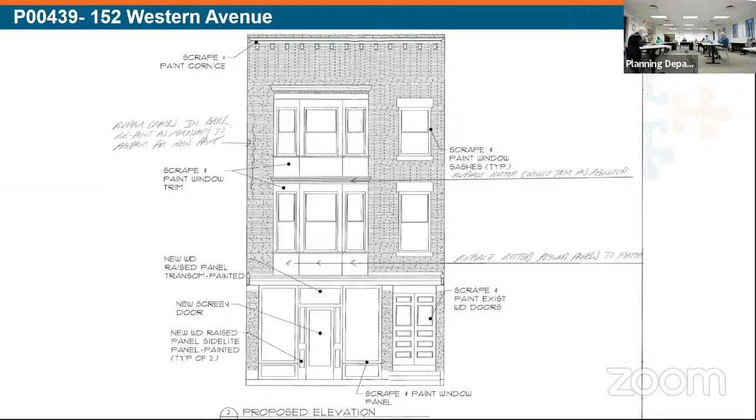The next item to come before the commission is 25 Delaware Avenue, in the Center Square Hudson Park Historic District. This is the construction of a 4-story multi-unit residential building and rehabilitation of an existing, or former, fire watch station.

We have Matt Duggan on Zoom, and then Michael, if you would like to introduce yourself. Michael Berkby, project director with Conifer Realty, the developer. Bill Lafricci with Hershberg and Hershberg Design Engineering. And Matt Duggan with TAT, the architect for the project.

Matt, just let me know when you want me to proceed through the slides. I was just going to start with a brief recap of the project and the steps we've taken to this point.

Conifer Realty became involved with the project a couple years ago. The property is currently owned by the Albany Community Development Agency, and we have it under contract for purchase. We have planned to rehabilitate the existing building and develop a 4-story multifamily apartment building behind it, situated on top of a semi-submerged parking garage. Last summer, we came before the HRC a number of times and had a good conversation and a collaborative effort to improve the design of the property, and I thought that was very productive and ultimately resulted in a better design than where we started.

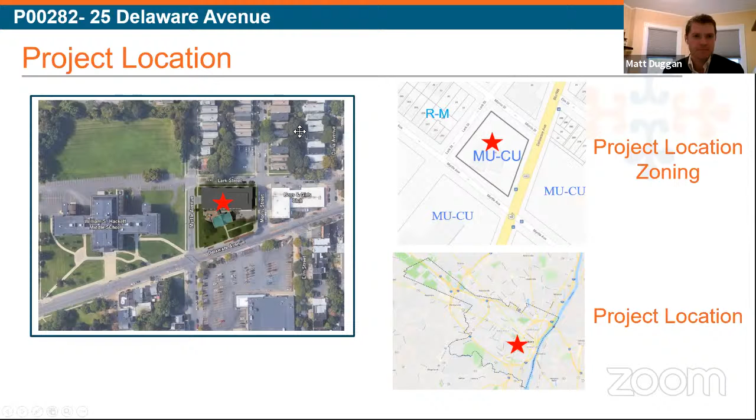You go about 2 feet up to get to the Delaware Avenue facing facade of the fire signal building, and then the grade drops off significantly. So the grade behind the fire signal building is a half story below where it is on the front, about 3 to 4 feet lower than Delaware Avenue. And as you get to the corner of Myrtle and Lark Street, you're down an additional 12 feet from there. So there is a significant slope as you head towards that corner.

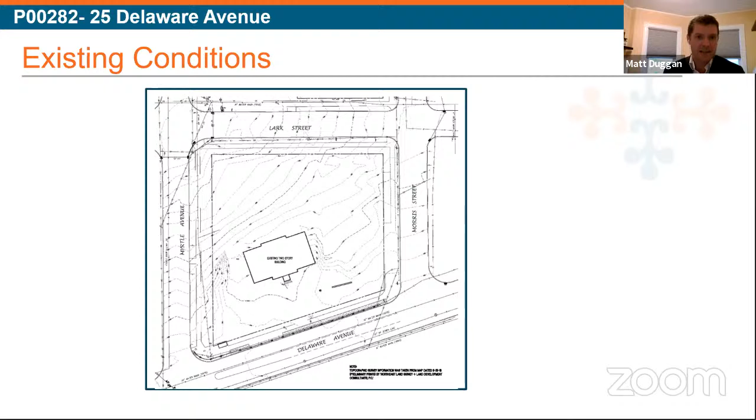So here's our, since we met, some change to the grading. One of the strong comments we had heard from the commission was a desire to restore the openings at the basement level of the building. So we had stated concerns about those openings and concerns of snowdrifts against them.

To address and mitigate those concerns, what we have done in this proposal is lower the grade on the south side of the building, that's left facing Myrtle Ave as you're looking at this plan. Essentially, today, those masonry openings are below grade, or at least their sills are below grade.

Additionally, to mitigate the concerns, we are proposing to add a crushed stone maintenance strip on the south and east elevations of the building to allow property management to remove snow drifts from accumulating against these windows and getting into the building. This is certainly a concern our client has and we have as architects, but we have heard your comments and are prepared to make these changes to include those windows, despite the concerns to building maintenance and health. We believe we do have methods to achieve the building staying in a healthy condition.

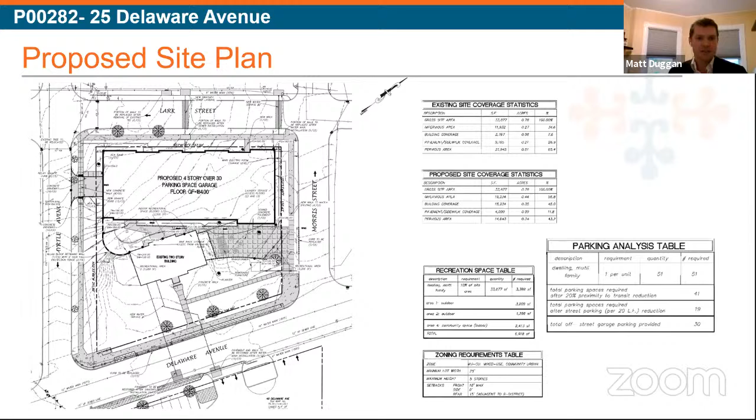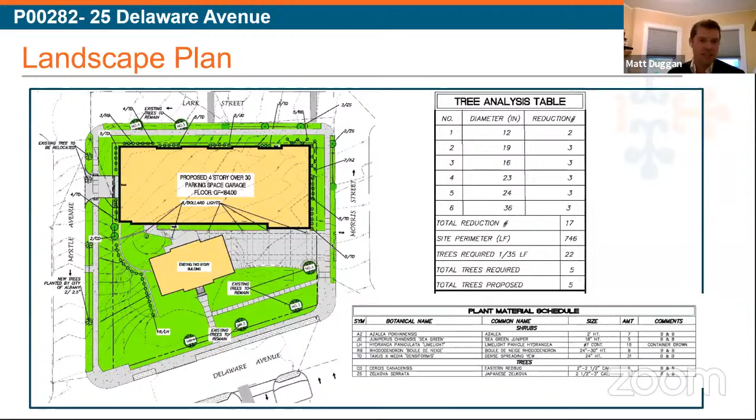So here is an image from the prior design. You can see that the retaining walls were a bit different, but it's also important here to look at the trees that are being retained and also the trees that are being removed. One of the comments from the site visit conducted last year by the commission was that there were some trees very close to the building causing potential damage. There are 3 of them, and those 3 trees are proposed to be removed. In the following slides, you'll see images of them in the photographs.

Our spec includes 2 different chemical cleaning procedures to remove it, and our spec also requires that all cleaning is done with a series of mock-ups. The preliminary mock-up cannot exceed 5 square feet. We will start with a 50 pound per square inch rinse nozzle and only proceed to a higher pressure as required, keeping it a slow process. Again, the preliminary sample can only be a maximum size of 5 square feet, and we have 2 different chemical paint removers specified to remove this paint.

On the brick itself, we will also be doing a cleaning procedure, very similar, however it will not use a chemical remover. Again, we will do a 5 square foot maximum mock-up; if the results are positive, we will proceed with a 50 square foot maximum size, and if acceptable, we will proceed to clean the rest of the building. Our spec requires that cleaned areas blend in with all adjacent materials so there isn't a stark contrast from one level of cleanliness to the next. That being said, we are proposing to clean the entirety of the building pending acceptable mock-ups, so that should be less of an issue.

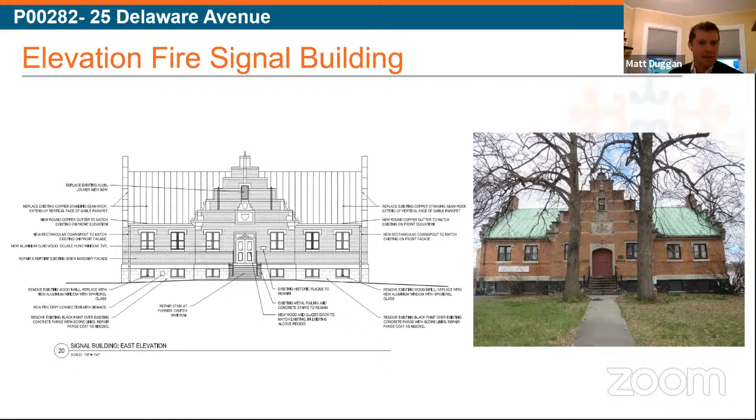That is basically taking its cues from what exists on the east elevation of the building, so the elevation facing Delaware Avenue. In the center, we will also be rebuilding and removing the former flashing that you can kind of see in the center. It's a little white in this photo of where the roof of the prior building was. There's also a concrete roof from the existing building, right in that area, that will also be removed. And that will be restored with new brick to match the existing.

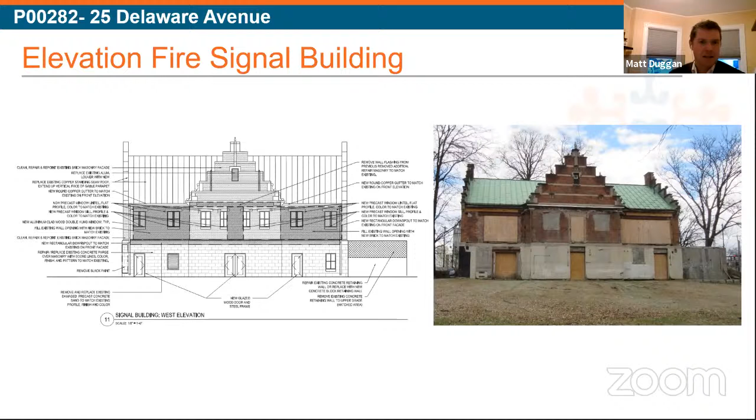And that will allow us to bring back the 4 masonry openings that previously existed on this facade at the lower level. We will be replacing them with new aluminum windows. They will be 2 fixed windows per masonry opening mulled together. On the upper level, we will be doing the same window scope that we described on the east elevation. The masonry scope will remain the same as the east elevation. You can see here some of the damage that has been caused by the roof and the coping at the parapet cap on the gable end. Next slide, please.

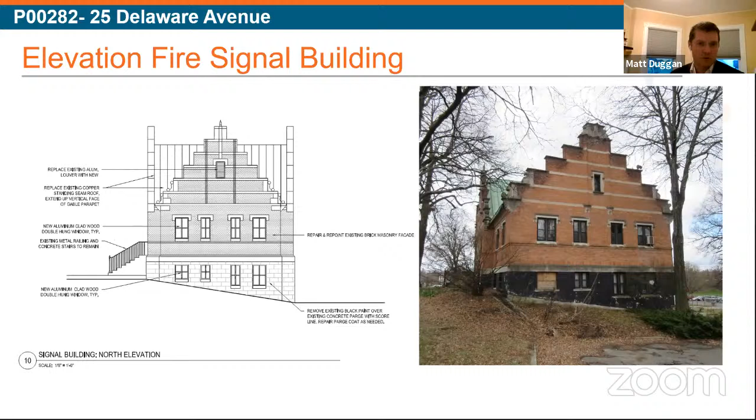And then here, this is the 3rd tree that is proposed to be removed. This tree, again, is right at the corner of the building, and that is proposed to be removed. In the site plan on the first page, you can see that similar but not identical to what's shown today, there will be a landscape buffer adjacent to the building. So those slopes essentially remain consistent from what you see today, with only minor modifications. Next slide, please.

So here's the plan of the building. On the right side is the lower level or the basement level. You can see that facing up on the page, that's the double doors on the west elevation, which is where the main accessible entrance to the building will be located. And to summarize the window scope, it's proposed to essentially have windows in all 37 of the original window openings. Today, there are 17 windows in those openings. So essentially, we will be restoring 20 openings to have windows that today are filled in with either masonry or plywood. Next slide, please.

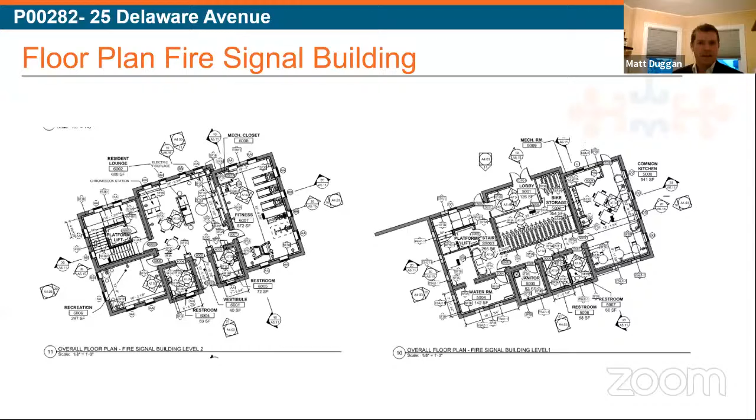So here we have noted the comments from last summer's site visit. Most of these items we've already touched on, but the first one was a request that all spalled brick be replaced with new brick to match the visual and physical characteristics of the existing. That will happen. Samples will be provided and a mock-up will be done prior to commencement with work on the

rest of the building. In terms of the mortar, our spec does require that the mortar match the original mortar's physical and visual characteristics. And as I stated previously, we will be doing a 20 square foot repointing sample prior to proceeding with the repointing throughout the building.

In terms of cleaning of the brick, like I stated, we will be doing that. Our plan is to do the 5 square foot cleaning sample, pending approval of the certificate of appropriateness for cleaning the masonry, and then proceeding with a maximum of 50 square foot sample before then proceeding to clean the rest of the building. Next slide, please.

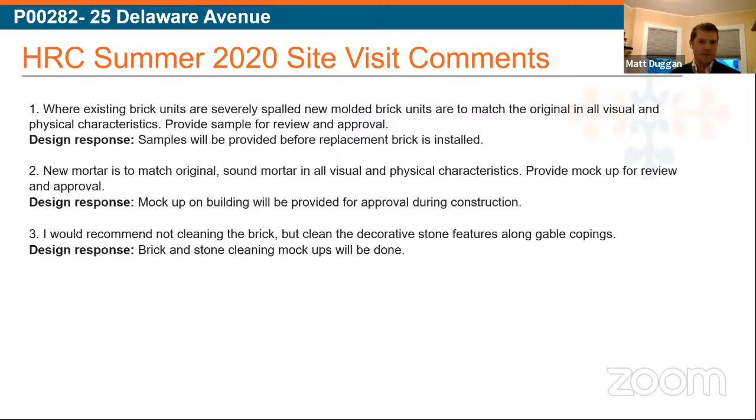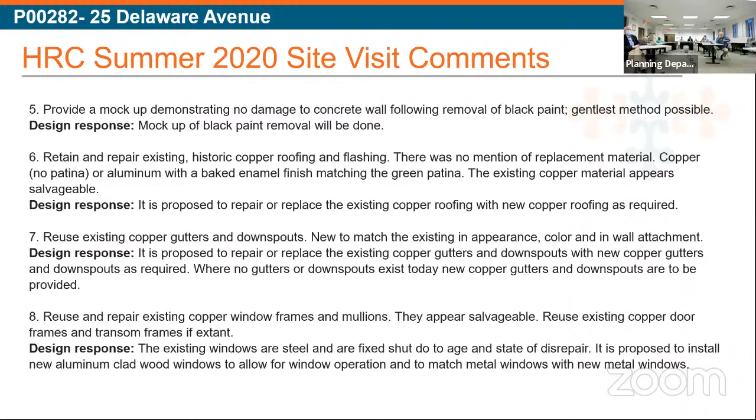Next slide, please. Are we missing some windows that were in the bottom west side? Here? Yeah. No, as Matt pointed out earlier, all the openings on the back were covered by the previous senior center addition. So for most of the windows that are being installed, they're pulling reference from the other elevations. But were there windows there when I first saw the drawing? Previously? On the left and the right of the entrance, yeah. Yes. Were those original windows that were put there in 1917?

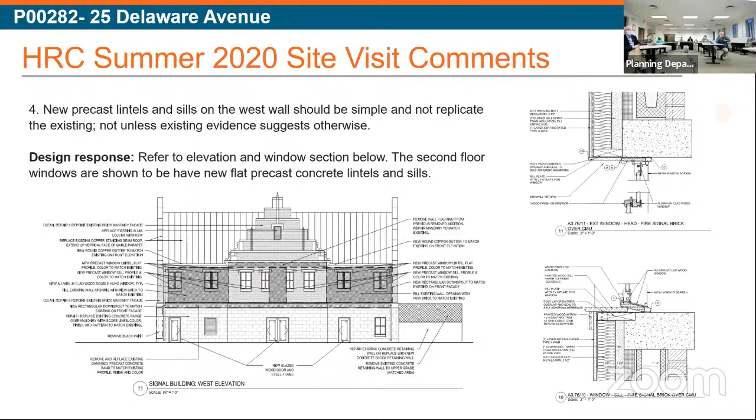Matt, there were no original openings, correct? We unfortunately do not know what the original openings were on this side. We found a photo from Delaware Avenue. We haven't found any photos from the rear. There was an aspirational drawing that was included in the article I was speaking about earlier from a year or two before construction started. And that does show what appears to be doors on the ground level and appears to be windows on the upper level.

But it's clearly an aspirational drawing. For example, in that article, it shows that there are dormers on the roof and several other characteristics that are clearly not present in the building. So it's hard to say what was original there. And I wouldn't say that the drawing that we do have is an as-built by any means. But what we're fairly confident is that there were openings there. What we just don't know is exactly the number or the location of them.

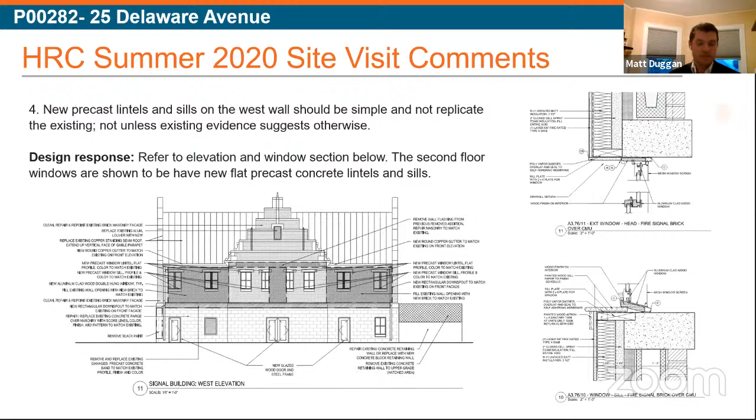So another comment was to provide a mock-up of the black paint removal. So again, we will be doing several mock-ups. We'll be doing that 5 square foot followed by the 50 square foot to ensure that we are not damaging the building when the paint is removed.

In regards to the historic copper roofing and flashing, unfortunately, it's currently in a state where it is causing damage to the building. So our proposal is to remove the copper flashing and roofing. If there are portions of it that can be retained, we certainly will do that. But that would present having patinaed copper in some areas and non-patinaed copper in others. So our preference would be, and we believe we will need to do the full replacement in kind of the copper roof and flashing.

However, the copper downspouts and gutters, where they exist, and if they are in salvageable condition, our proposal is to retain those. If, however, they can't be retained, the proposal is to match them in kind.

In the existing windows, the proposal is to replace the existing windows. We do not believe the existing window sashes are original, and they're currently in a state of disrepair where you cannot open them in a normal manner. And also, there are only 17 surviving what we believe to be non-original windows out of 37. So we do have some concerns that if there are repaired windows and replacement windows, that it may not be the result that we're all hoping for. Next slide.

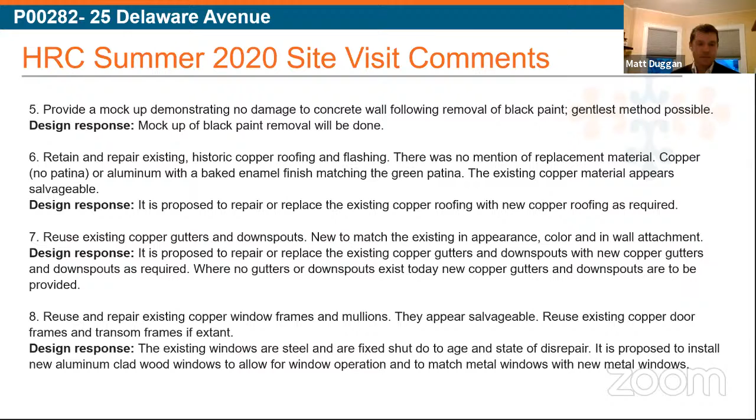Patch and repair the front steps where there are broken and missing corners and also missing railing. That is included in our scope. In terms of vine and vegetation removal from the south wall, our spec does include the removal of all vegetation from the walls. It also does include removal of the roots of vines that are growing up the facade as well. Item 11, this is the note on the 3 trees. It is proposed to remove those existing 3 trees immediately adjacent to the building.

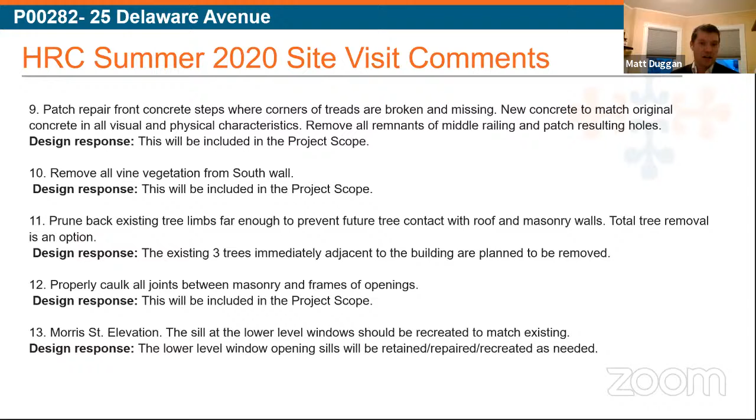All of the joints between masonry openings and the adjacent material, whether it's a louver, window, or door, will be caulked. And the sills at the lower level windows on Morris Street already exist. On Myrtle Avenue, they do not exist, and we will be recreating those at the basement level windows. Next slide, please.

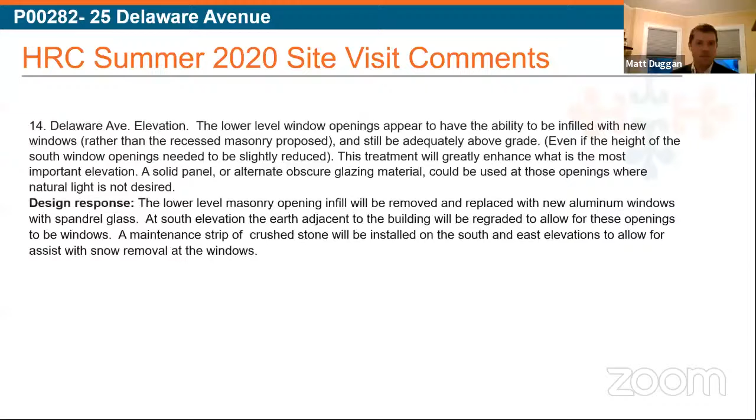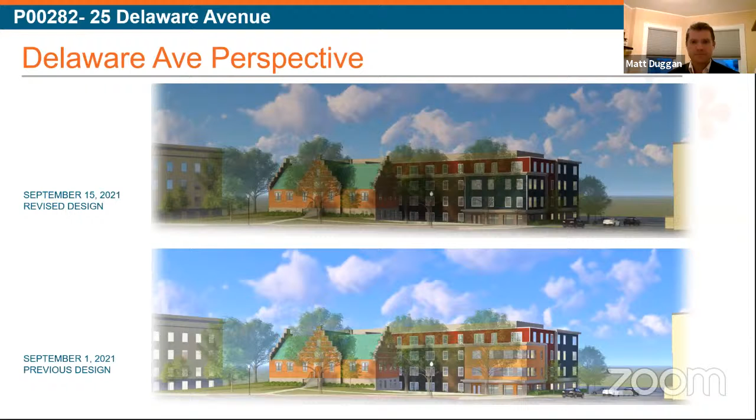So this is the proposal from September 1st. You can see here we were proposing to have a stucco finish on the entry element of the building, and to also have wood panels in between some of the storefront at the ground level, which is facing the leasing and management office space for the property. We were also creating essentially a ribbon window element on the facade as well. All of these elements have changed as we go to the next image here. So next slide, please.

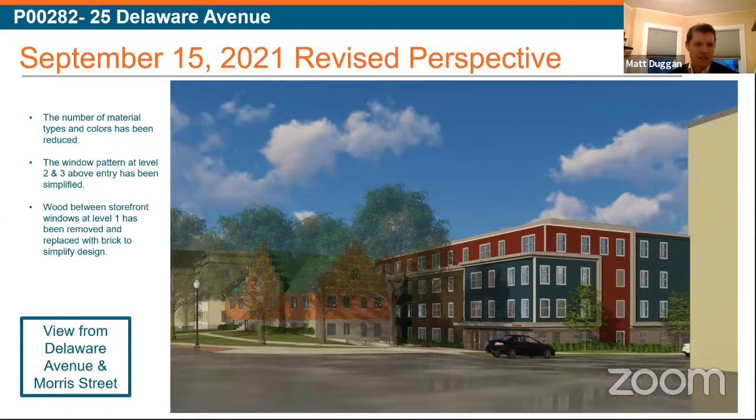So here we heard the concerns about the busyness of the design, the number of materials, and so we tried to simplify it and help unify the building through that simplification. At the entry element, the stucco material has been eliminated. In its place, we're continuing to use the blue clapboard siding, which is used on the Lark, Myrtle, and Morris elevations of the building. We've simplified the window pattern to eliminate the ribbon window look, and we have also simplified the base of the building, which we'll see more in the next slide.

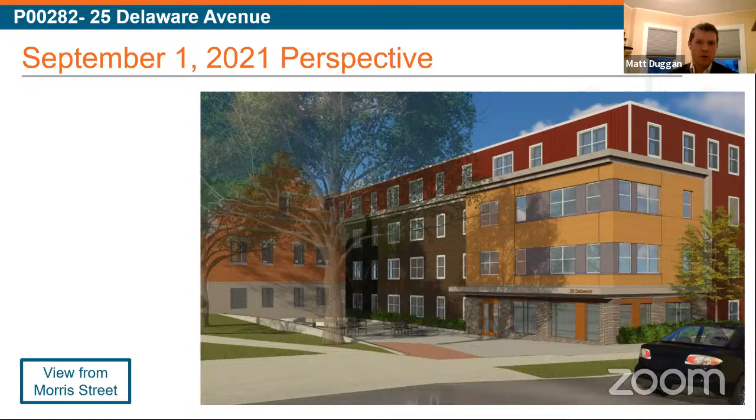So you can see here, this was the prior design. You can see that at the brick base, we did have wood pieces in between the storefront. This was working with that ribbon window that we had at the upper level. So if we go to the next slide, please.

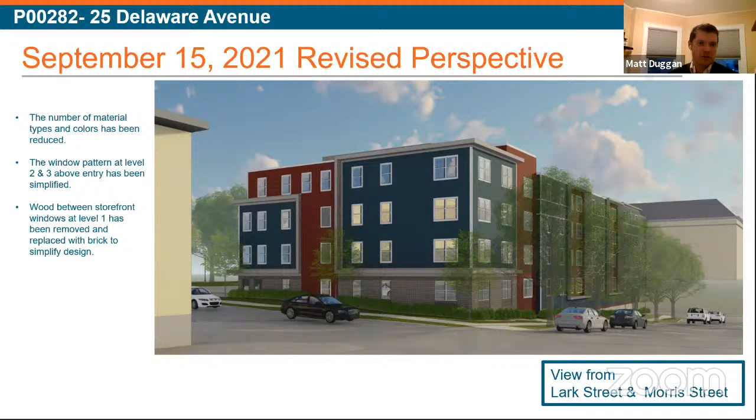So here you can see the simplification of the materials and in the fenestration. You can see further at the base, while we do retain some of the larger glass openings fronting the leasing space, the window furthest to the west or furthest towards Lark Street is the same window size as the windows on levels 2 through 4. And that ties in with the treatment of the base as you work your way to the corner at Morris and Lark Street. Next slide, please.

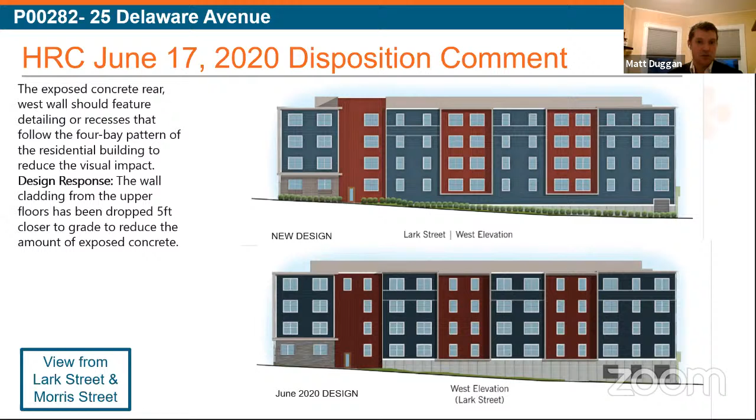And that line goes across, and as we get to the final elevation on Myrtle Avenue, you can see this line also lines up with the top head of the garage doors. So together with landscaping and with this significantly lower siding line, the visual impact of the concrete is greatly reduced in the new proposal. Next slide, please.

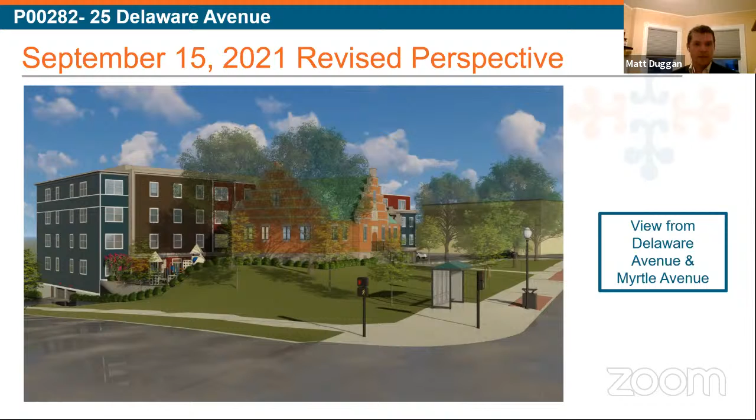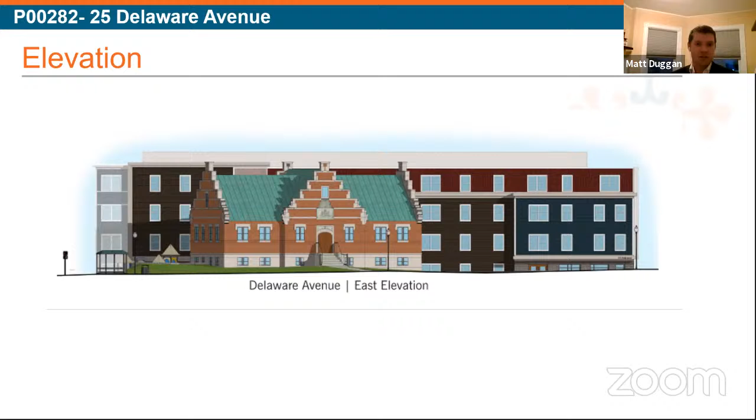So here is a view from Delaware Avenue. As I mentioned at the beginning of the presentation, the grade of the fire signal building is about 2 feet above the elevation at Delaware Avenue. And you can then see that down the hill. Next slide, please.

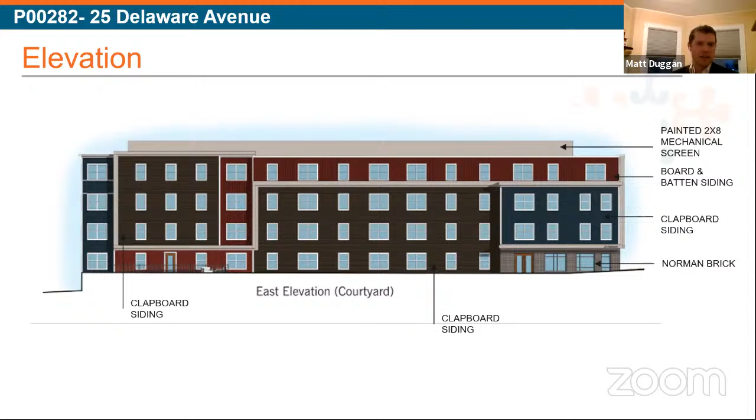So here you can see the materials. We have 3 different color siding materials. We are showing a board and batten at the 4th floor in vertical elements as we were before, but we will speak to that more as we get to the next slides. Next slide, please.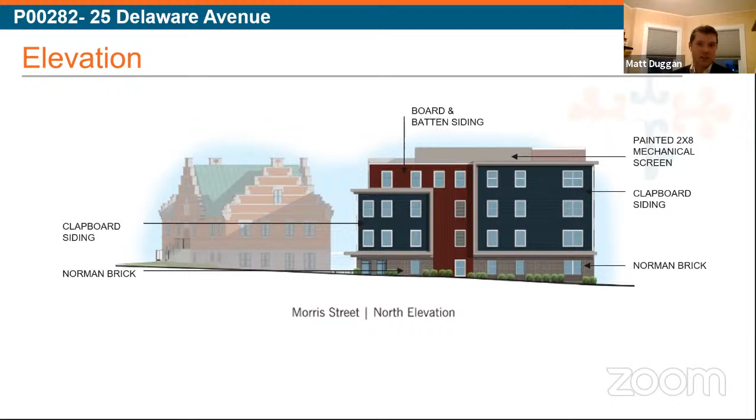This is now the elevation on Morris Street. You can see here that level 3 cornice line being further accentuated by the fact that the 4th floor is set back from that entry element. Next slide, please. Here again is the elevation on Lark Street. Next slide, please. And then here is the elevation on Myrtle Avenue. This is the lowest elevation on the site and where the entrance into the garage is located. Next slide, please.

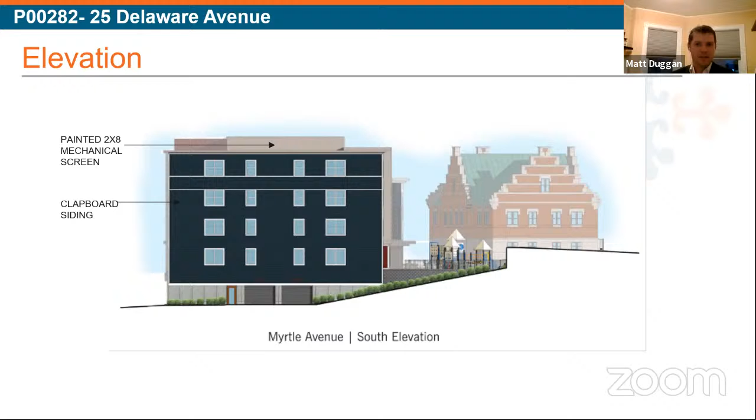So we did hear that there were some concerns about the board and batten. So we have provided some images here that explore eliminating it. So here the red color material is now shown as a horizontal lap siding. This lap siding would have a 6 and 7/8 exposure. Next slide, please. Matt, we lost you there for a minute. We had, the lap siding was gonna have a 6 and 7/8 exposure. Yes. So the next slide will have another image of that as well.

So here you can see that that siding then is turning the corner in between the 2 blue elements that are on Morris Street, and also that horizontal lap siding will be continuing down Lark Street. Next slide, please.

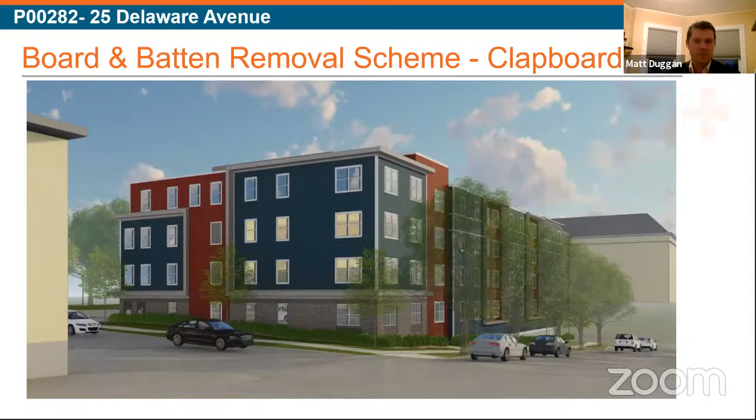And then here are the 2-dimensional elevations depicting that lap siding in lieu of the board and batten. So the thought behind the board and batten was that we do have this element that is happening above the cornice line on this east elevation. And then as you get to the north elevation, it does become a primarily vertical element. So that was the thought behind the board and batten.

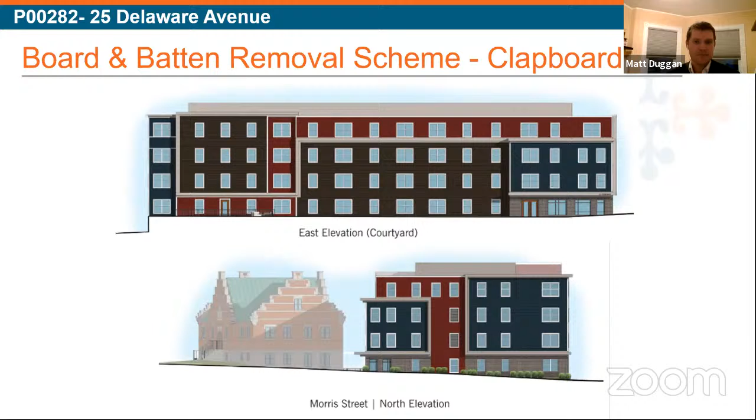But we did want to present the clapboard option, as we do think that it does further simplify the amount of materials on the building, which we know is something that the commission was advocating, and we do know of some concerns about board and batten on this building in general from the commission. Next slide, please.

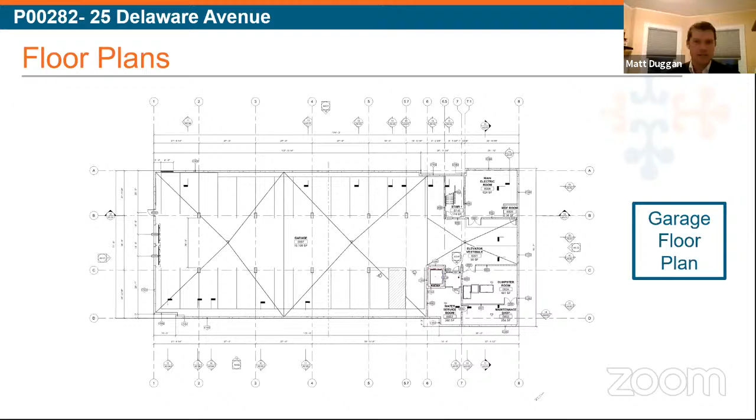So here is the floor plan of the garage level. On the left is Myrtle Avenue where the garage entrance is. The other three sides are either fully buried or nearly fully buried. Next slide, please. This is the first floor. This is the entrance floor. On the lower right, you can see that entry element. It's important to note that this level is at the same elevation as the basement level of the fire signal building. Next slide, please.

The second and third floors are nearly identical. You can see that it does have a small step in the elevation, or in the footprint, at the entry element. And then when we go to the next slide.

At the fourth floor, that entry element is not accentuated. It further accentuates that third floor cornice line.

At the roof plan, we are showing the location of the mechanical units. Those are behind the three-sided mechanical screen you can see here, and on the right is a section through that screen. The screen is 6 feet tall and consists of painted 2x8 boards mounted to posts behind the screen. The paint color of these boards is proposed to be the same as the cornice ribbon element throughout the building, so it's that light gray color.

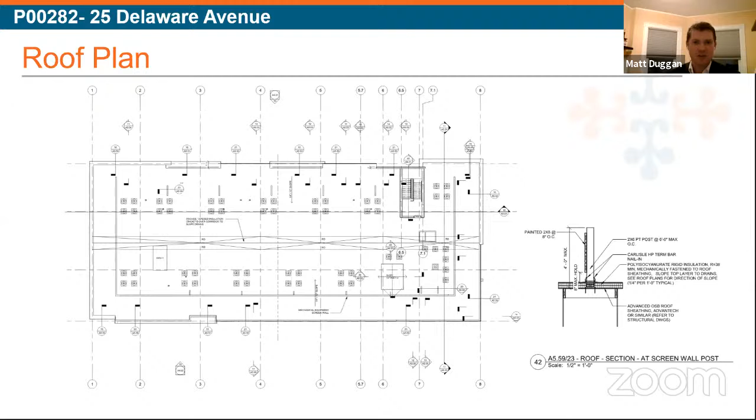This is the proposed siding. Unfortunately I don't have the exact color with me, but this is definitely representative of the look. I think this is an older sample board because I don't have the exact colors on this, but it's more representative of what it looks like. It is slightly textured, but less deep than some similar products, so it's not super noticeable unless you're really close.

This is a composite material that includes a polymer as well as stone dust, so that mix of materials means it is very durable. I also have a sample - this isn't exactly the trim we're proposing to use, but it is of a similar product type.

And this is the brick that is proposed for the lower level around the management spaces. It's a pretty neutral gray, I think - doesn't stand out too much, but still provides enough definition so people will know where the main entrance to the building is.

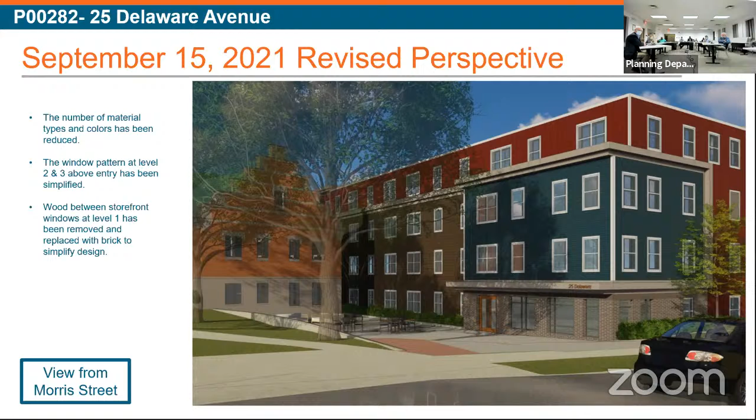But overall, good job, excellent job, and I think it's good for the building itself, and it's just marvelous for the historic building. It'll show it off and bring it around for another generation, or many, hopefully. It also, from a planning standpoint, enlivens the site. It gives a use to that building. I think it's an excellent project.

When do y'all expect to have it completed? We're looking at about a 20-month construction period.

Well, we're on a roll. I'll request a motion be made. I make a motion to approve the project, given the little differences and things like that with the siding. And I'd like to make a condition that the HRC be involved in the review and approval of the mock-ups regarding the historic building, and mock-ups of materials on the wall or something like that of the new addition.

Lee, when you say siding, are you approving their proposal to replace the lap siding, or the board and batten with lap, or for them to keep the board and batten as proposed? To me, it doesn't matter. It really doesn't matter. I think it's an architectural decision for the designers. I think either one works.